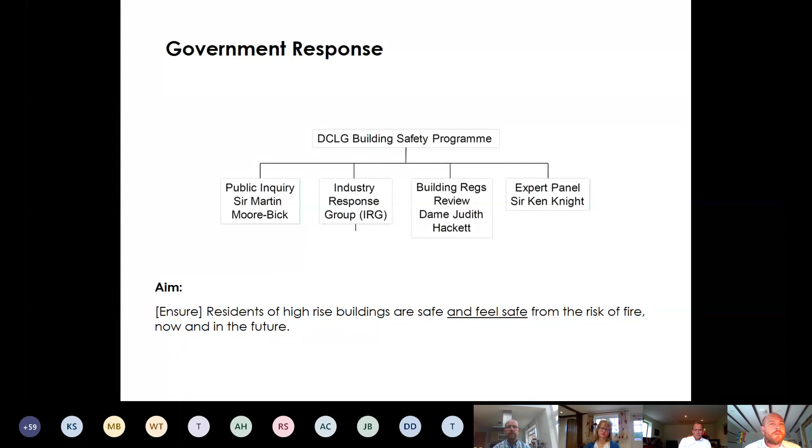So as a bit of a timeline: June 2017, obviously the Grenfell incident occurred. Then in July 2017, the MHCLG commissioned a large ACM screening test programme, which looked at all the different ACMs, the 3 different types, and tested them with different substrates and different external insulations within the cavities.

So you've got something like Duo Slab, the mineral batt, and you've got the phenolic insulation like K15. This was really to try and understand the fire performance of those, because for various reasons there was no testing data for them. I'm not entirely sure why there wasn't, but there wasn't.

Then again in the same month, the independent review of the building regulations was commissioned by Dame Judith Hackitt. Then in September 2017, the industry responded to a call for evidence, and then in December of the same year, Dame Judith Hackitt's interim report was published.

And then as we get further into it, it gets a bit more meaty. So in September 2018, the MHCLG circular on assessments of external wall cladding systems and advice note 18 called to remove all ACM from existing buildings.

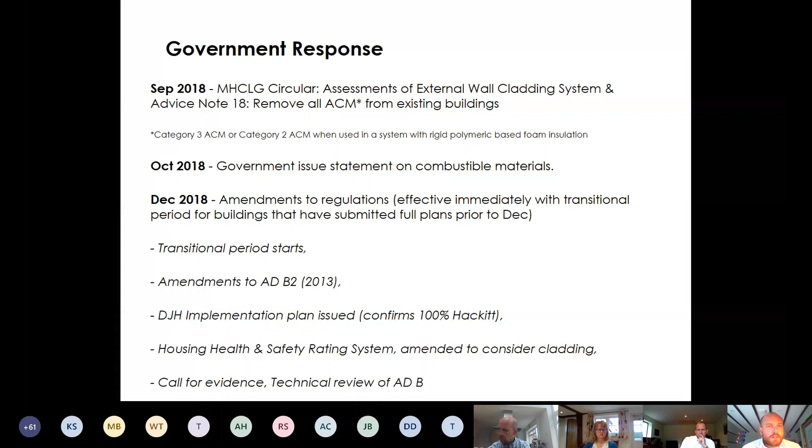In February last year, the transitional period for the buildings submitted for full plans expired, so everyone was now fully non-combustible, as it were. And in March, there was a further minor amendment to ADB.

In May last year, consultation on BS 84141 and BS 84142 was produced. 84141 is a test, which is what BR 135 is based off of. And it's the fire test of insulant materials over 18 metres.

One represents the backing wall, so one is masonry block, and two is a framed substrate, so SFS with sheathing board, which is more commonly found on buildings over 18 metres.

MHCLG issued their response to that and clarifications to any FAQs which came out of that, and then a government fund of £200 million was announced to remediate existing defective facades in the private sector with ACM, just ACM.

That was soon realised that that wasn't enough, and it got bumped up to 600 million. And as we'll come on to in a bit later, they then announced a £1 billion fund to try and remediate all facades, not necessarily ones just with ACM on it.

In June 2019, the government issued a consultation on proposals for reform of the building safety regulation system, which was an eight-week consultation. That was to go before parliament in 20/21. So we're kind of getting towards that process now, with obviously the draft bill just being issued last month.

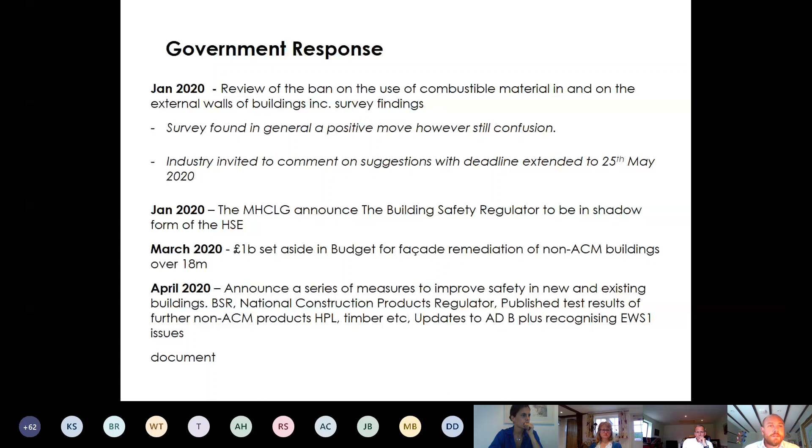And then in May, Approved Document B update was published, confirming sprinklers and consistent wayfinding signage to all buildings over 11 metres now. So there's a reduction there, 4 stories, but the relevant building requirement is still 18 metres. And the draft Safety Bill was published, plus a correction slip. So that was the big thing we'd all been waiting for last month.

And I said earlier, in August we're still waiting for an update from the MHCLG regarding the proposed changes, ban, and the review of that by industry. So that'll be quite important, because that will resolve a lot of issues again with regards to cavity trays, etc.

Hopefully. So if we go way back, before the changes, we had a whole raft of different ways for compliance with buildings over 18 metres, or relevant buildings. You had Approved Document B1 and B2 - B2 at that time, or B1 Volume 2, was the most relevant one. You had BR135, the fire performance of external thermal insulation in walls for multi-storey buildings. You had BS9999, you had BS9991, and you had BCA Technical Note 18.

BCA Technical Note 18 tried to pull all this guidance together and give the building control bodies a linear approach as to how we can approve or review these types of facades.

So, the changes to the regulations and ADB2. The first thing to note is that changes to regulations are law - there is no latitude, and they will always take the conservative position. Changes to the approved documents are guidance supporting the regulations, but ignore these at your peril, particularly when it comes to things like fire safety. However, they're not legal requirements.

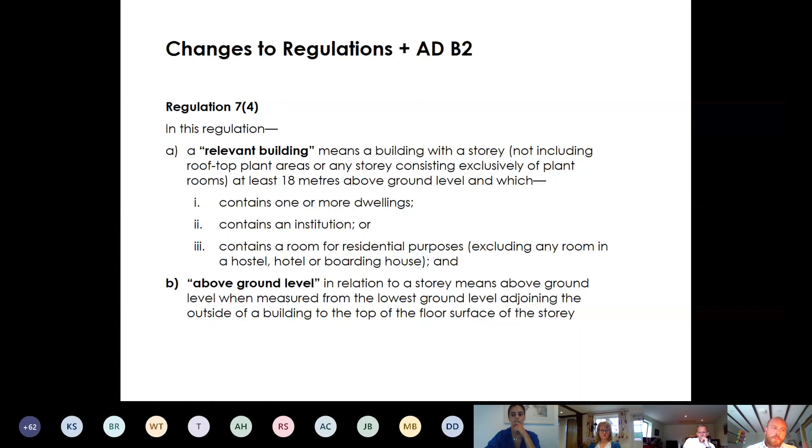And the first time we saw a real definite definition of 'above ground level', and it was in a regulation as well, so it's law. Above ground level, in relation to a storey, means above ground level when measured from the lowest ground level adjoining the outside of a building to the top of the floor surface of the storey. So it's not the median ground level, it's not the pump access level - you've got to pick the lowest ground level on that building, and that's where you take it from. So it's nice and clear.

And then Regulation 2.6: in these regulations, any reference to the external wall of a building includes a reference to anything located within a space forming part of the wall, any decoration or other finish applied to any external wall, but not internal surfaces forming part of the wall, any windows and doors in the wall, and any part of a roof pitched at an angle more than 70 degrees to the horizontal - basically where a roof turns into a wall, that magic 70 degrees. So again, first time it's in a definition in regulation, so it's law, of external walls.

And then there's also guidance on specified attachments in Regulation 2.6, which defines those as being a balcony attached to an external wall, a device for reducing heat gain within a building by deflecting sunlight which is attached to an external wall, or a solar panel attached to an external wall.

Now, again, clear guidance on balconies that hadn't been defined really before, or specifically in the approved documents. I've never really come across a solar panel within an external wall yet, but I know they have been done. And then obviously you've got your brise soleil, the reduced heat gain on a building.

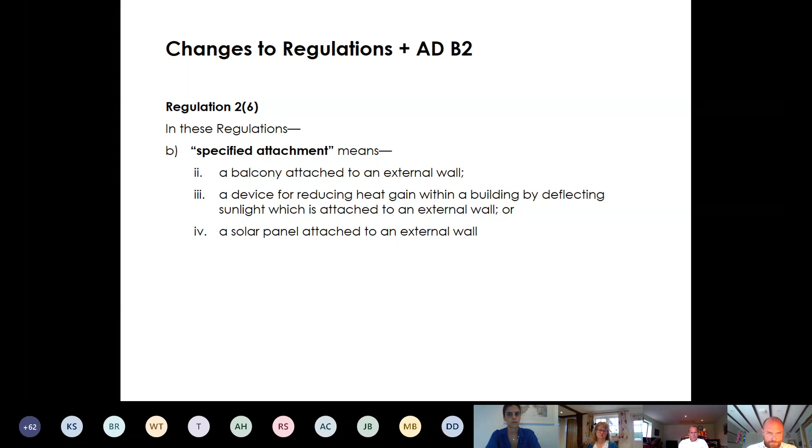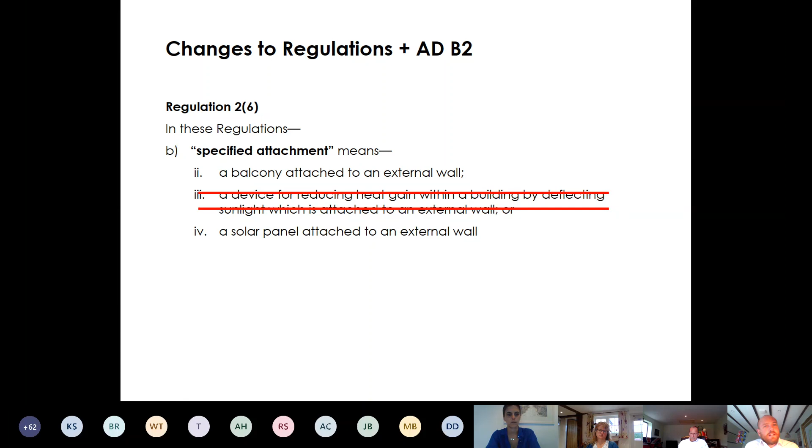Now that then got retracted because I believe a brise soleil manufacturer, or possibly an architect, took them to court over it, because the consultation period for that particular regulation change wasn't done according to the process. So it was a bit of a technical knockout, that one. It got taken out, but it's going to come back in again.

So the basic principle of these regulation changes was that all elements of an external wall, excluding internal decorative finishes, are to be to BS EN 13501 European Combustibility Class A1 or A2 S1 D0. So S is the smoke that's emitted and D are the droplets that are formed. Unless they're included in the list of exempt materials, which we'll come on to later.

So when looking at the approved document and the guidance that's around, obviously they had this circular from the MHCLG about external fire spread and B4(1), which states the external walls of the building shall adequately resist the spread of fire over the walls and from one building to another, having regard to height, use and position of the building. So it doesn't actually tell you the height you need to consider or the position, but it gives you this blanket overarching requirement. And this is what the government are kind of hanging their hat on, or previously did.

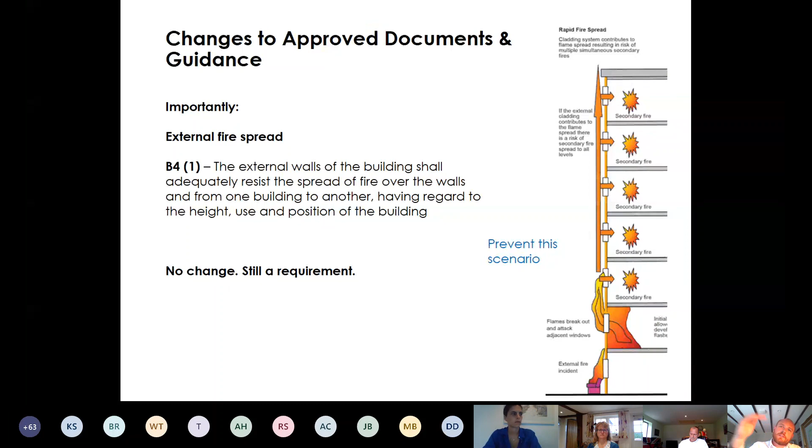So there's no change, it's still a requirement, it still exists. And as you can see from the diagram, it's to prevent this kind of scenario where you've got an external or internal fire. You get breakout through the window, and it then has a possibility to ignite the facade. If the facade doesn't adequately resist fire spread - it's got combustible materials in it, or it could be the surface spread of flame in the finishes - it can lead to secondary fires, and it can have this consequential rapid fire spread up the building.

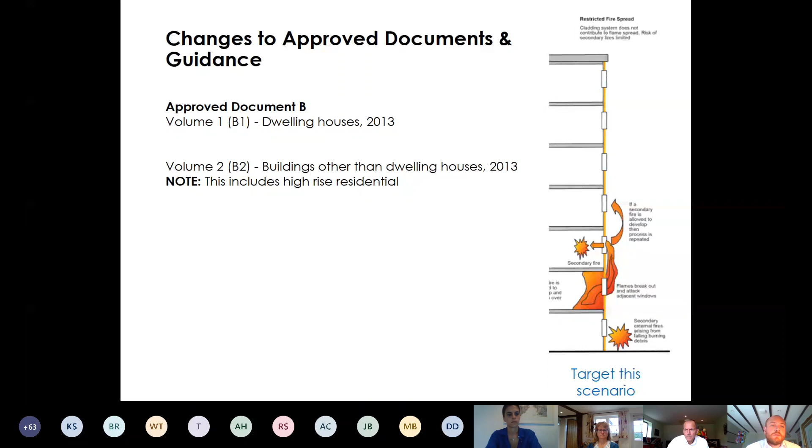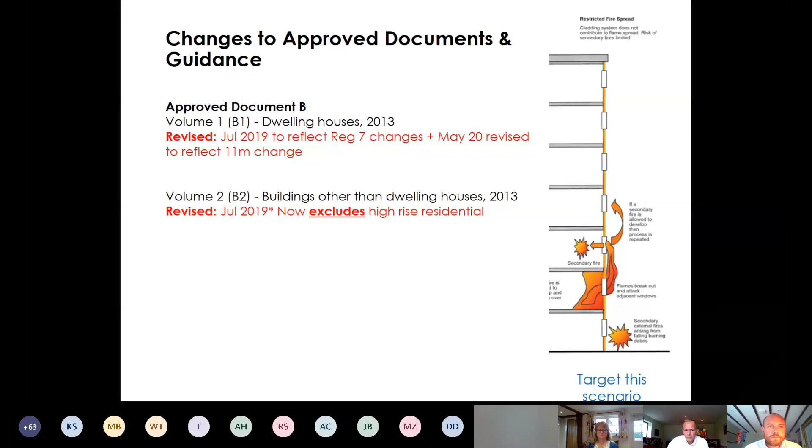Now, in approved document B, volume 1, B1, dwelling houses 2013, and we had volume 2, B2, buildings other than dwellings, but that included high-rise residential. They revised that in July 2019 to reflect the Reg 7 changes, and in May they revised it to reflect the 11 metre change. And then what we saw was that in July they took high-rise residential out of volume 2 and put it into volume 1, which makes more sense because it's residential and domestic.

BR 135, that guidance - the fire performance of external thermal insulation for walls of multi-storey buildings - has not been amended or redacted. It's still there, but due to the regulation changes, it's effectively made this obsolete for relevant buildings, i.e. BS 8414 testing is no longer an acceptable route of compliance. It's got to be non-combustible or not.

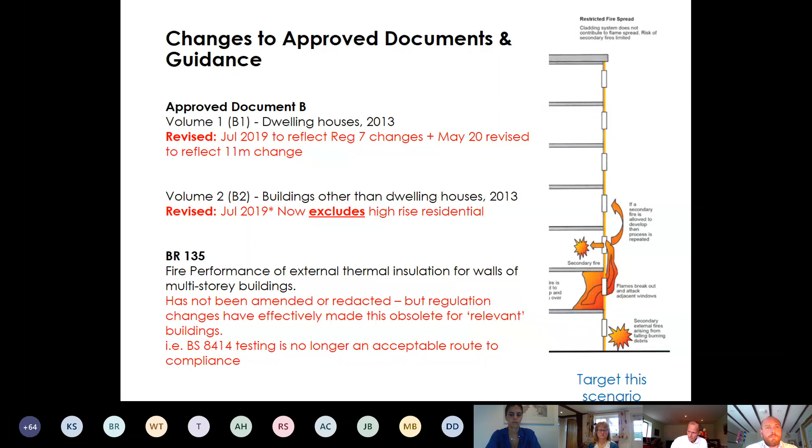The Building Control Alliance technical guidance note 18 was updated in September 2018 to include reference to the government circular. It's not been updated since, as far as I'm aware, to reflect the regulation changes, but is now effectively obsolete - I'll come on to that in a second. BS 9999, there's been no update since the regulation changes, but that will obviously need to be updated as well. And again BS 9991, same again, no update yet, but that will be coming.

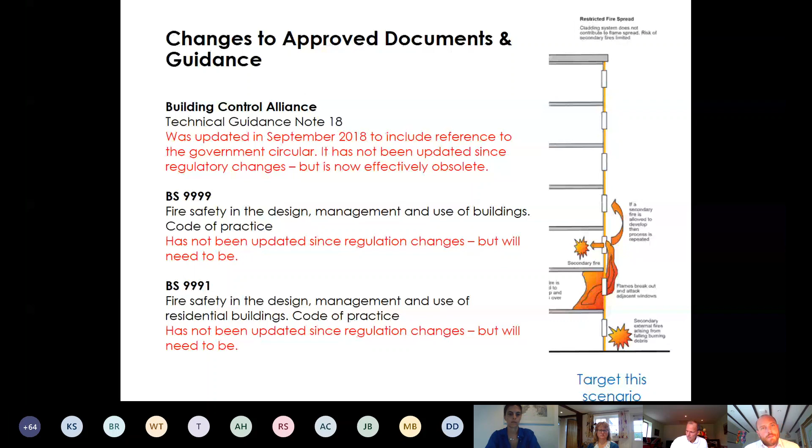So going back to the BCA technical guidance note 18, this gives an explanation as to why we ended up in the situation we did, where the ACM build-ups hadn't been tested and that sort of thing. It gave four options as to how you could comply or check a facade over 18 metres. Option 1 was basically complying with the approved document - totally non-combustible or limited combustibility or better.

Option 2, you had a full-scale test in accordance with BS 8414, part 1 or part 2, and install on site exactly the same construction, exactly the same breather membrane, exactly the same fixings - which is very, very rare to find. And what was found was that the actual test commissioned had been done by manufacturers. It wasn't like an independent test - it was Kingspan or something like that.

And obviously Kingspan used their breather membrane. They used their subframe for the rain screen cladding, etc. So yeah, it's a bit of a tricky one, that one.

And then option 3, you provide a fire engineered desktop study for each different wall type based on the BR135 approach and test data. This is where option 3 was mostly used, really, and we found all these desktop studies that were being produced, comparing various proposed facades against a current satisfactory fire test.

Now, with regards to ACM and aluminium, there was no test because it was a bit of a known secret that the performance is questionable, and the desktop study report that was mostly being hung on was one for a terracotta tile. Now, you can't really compare a terracotta tile to an aluminium rain screen facade, so it kind of got a bit disjointed, or not necessarily abused, but a bit wayward.

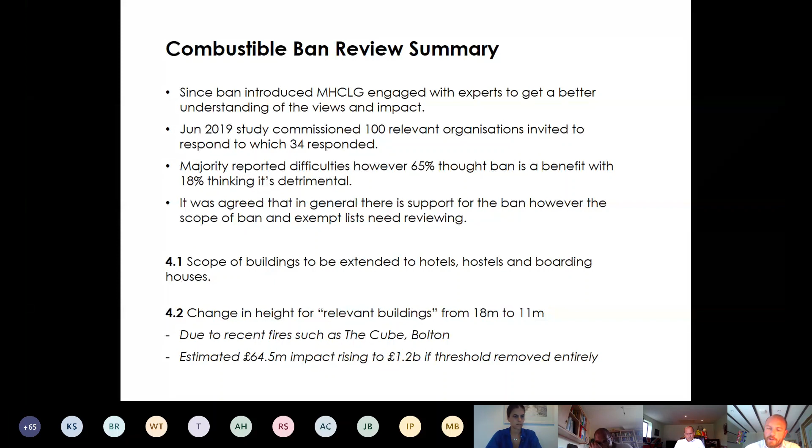Obviously that has come in now due to recent fires such as the Cube in Bolton. Now the impact of doing this, they reckon there's about a £64.5 million impact, rising to 1.2 billion if the threshold is removed entirely. So they took that into consideration and considered the 64.5 million as being something worth it, obviously not money over safety, but something that is doable.

And section 5, ACM PE core materials to have a complete ban on any building of any height, as the material poses significant risk regardless of scenario. So whereas essentially you could have a 3-storey building and still use ACM under the current regulations, they're looking for just a complete ban on ACM PE core, just because the calorific value is far too high. It's just too much of a risk, which is sensible.

And then section 6, solar shading included in attachments, but should retractable awnings be included, as currently they are? So the retractable awnings are those over your Costa Coffee or similar, where you've got your typical commercial space on the ground floor. There's a question over that, and basically none exist, or you probably could get them, but they're very, very expensive. So they're asking industry, do you think we should retract that?

Section 7, with a general review of the exempt list, requesting suggestions from industry for anything that they think should be removed or needs to be looked at, but they focused on a couple of items specifically.

So 7.1, they proposed an 18-month relaxation on cavity trays, or the exemption of cavity trays between two leaves of masonry. If it's between two leaves of masonry, you can have a cavity tray of whatever material you like, even combustible, so your DPC tray etc. But if you have an SFS or a different backing wall, then it has to be A1 or A2 compliant.

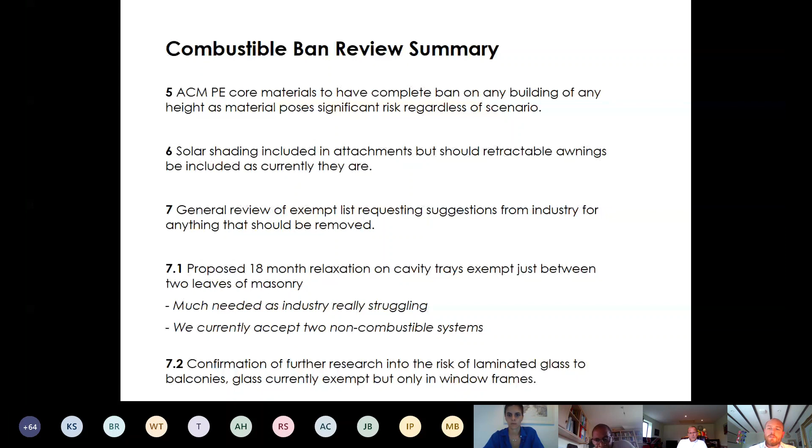7.2, confirmation of further research into the risk of laminated glass to balconies. Glass is currently exempt, but only in window frames. You saw a lot of balconies with these glass balustrades. In order to achieve the containment requirements of approved document K, a lot of them were laminated. Now the lamination, which is sandwiched between the two panes of glass, is highly combustible. But does it pose a risk? Don't know. The regulations said nothing on balconies, so that caused a bit of an upset. Most designs went back to traditional steel balustrades. But further research is going to be put into that to see whether that is actually a risk, with a view to possibly relaxing it or adding it to the exempt list.

There's additional clarification needed where roof membranes lap up external walls, and the Class B classification. On the exempt list, it's stated that membranes are exempt from Regulation 7 changes. However, there's also a requirement for any membrane on an external wall to be Class B. So there's a bit of a conflict between two bits of guidance, or a regulation and the guidance. Where you have a roof membrane, it may not apply on a parapet, because Regulation 7 doesn't apply there, as you've got two external areas either side of the wall. But if you had a roof terrace that butts a facade, and you have to lap the waterproofing membrane up the facade, essentially that is now a membrane on the relevant wall. Hopefully they can clarify whether it's a risk or not, because it's still very questionable, and they're looking into providing further clarification on that.

7.4 may lead into that one, where materials below ground level are currently exempt because they're sandwiched below ground when part of the facade, but they're looking to extend this to 150mm above ground level. This is particularly around roof and facade junctions, balcony upstands, etc. There's a lot of issues with insulation at those points, because it seems a little bit silly, but where you've got an inverted roof and your XPS insulation comes into your facade, essentially that thin strip of insulation is part of the facade. So by relaxing that zone, it kind of gets over that hurdle, and it questions whether it's actually a risk.

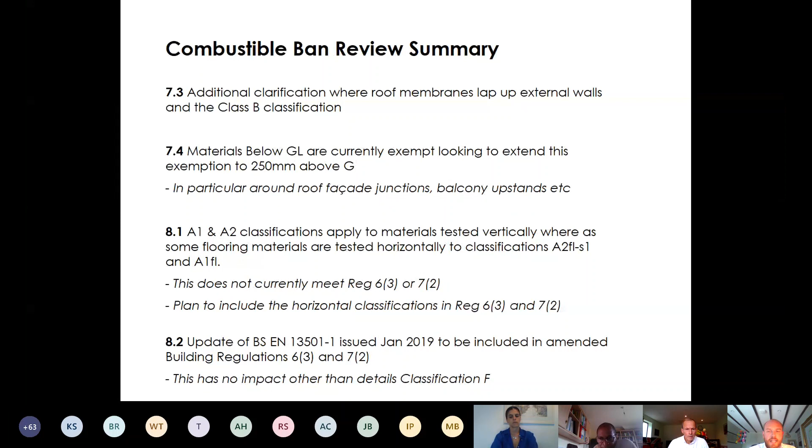They're looking to incorporate that, which I think is a sensible move. Then section 8.2: there's an update of BSEN 13501-1, issued in January 2019, which needs to be included in the amended regulation 6.3 and 7.2. This has no real impact, because the classifications are still the same, but they added another classification, which is F.

So on to the draft building safety bill. This was published in July, last month, and it's the first time we really get an indication of where things are heading and what the act looks like—it lays out the different areas, the duty holders, the classifications, the gateways, etc. It's still not in yet; it's got to be approved, but it gives us an indication of where we're going and what to expect.

In principle, combined with the fire safety bill and the fire safety order, which are also being revised and going to be issued towards the end of this year, the safety of residents in all blocks of multiple occupation will be improved. That is the main aim.

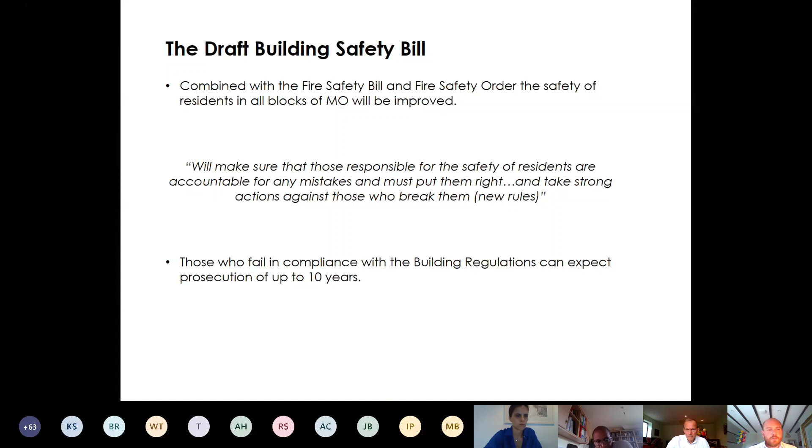There's a quote that says it will make sure those responsible for the safety of residents are accountable for any mistakes and put them right, and take strong action against those who break the new rules. If you dig into the guidance, if you fail to comply as a duty holder or accountable person, you could be prosecuted with up to 10 years in jail. So it's quite serious, the ramifications of that—and so it should be—but it's the first time we've seen any real accountability with regards to the building regulations in this area.

So the Building Safety Regulator, or BSR, will sit within the Health and Safety Executive, and have three main functions: to oversee the safety and standards of all buildings, directly assure the safety of high-risk buildings, and improve the competence of people responsible for managing and overseeing building work. It will establish a register of relevant buildings all across the country, existing and new—an ongoing thing.

They'll be responsible for all major regulatory decisions at key points known as gateways throughout the life of a building, from design and planning to occupation and ongoing occupation. This includes whether to allow the building to be constructed or later occupied—they have total control, they have the final say. So you could build a building, it's great, but it's got to be signed off by them, and until it's signed off, it cannot be occupied.

You can see there's going to be a whole new process the industry has to get its head around. We find as warranty providers, without our warranty, they can't sell the unit, and the unit, particularly in London, could be worth upwards of £10 million. So there's a lot of money riding on the certificate, but now there's a whole other layer that needs to be complied with—if the BSR aren't happy, it's not going to go ahead. The building needs to be complete, and no certificates can be issued ahead of that until the BSR are happy.

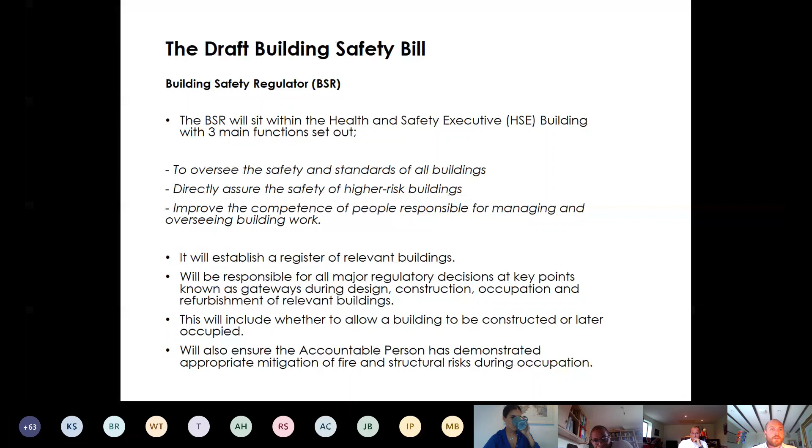It will also ensure the accountable person has demonstrated appropriate mitigation of fire and structural risks during occupation. So they sign it off, it gets occupied, and there's an ongoing accountability for the safe occupation and management of the building.

They'll also produce advice for duty holders to help complete their responsibilities, and give advice on current and emerging safety risks. So as well as just being a regulator, they're there as a resource for industry to go to. It's not a case of just saying you've got to do this and walking away from it. It seems like they're taking quite a proactive approach in being available for advice and that sort of thing, and trying to help get the buildings over the line.

They'll ensure designers and builders can access advice on delivering safe buildings, and advise government on changes to regulations and approved documents. So they really become the authority, the main place for regulation change or monitoring. Rather than, God forbid, waiting for another disaster, it's a bit more of a proactive approach. They'll oversee the performance of building control bodies and the competence of those working on buildings, to give confidence to duty holders and residents.

They'll give government new powers to better regulate construction materials and products under a new UK regulatory regime, which is what we kind of need. Currently, as warranty providers, we'll have a facade proposed to us, particularly under the new regulations, and we'll review it, looking at various testing data that's available. It's a bit disjointed, and it's still open to interpretation.

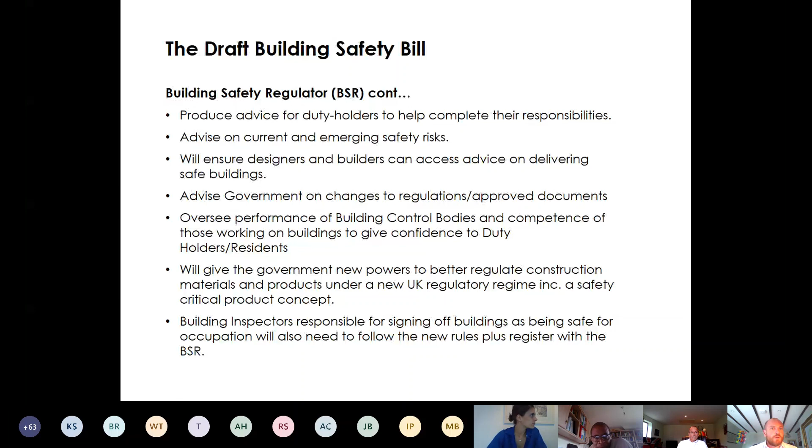So there's 3 main gateways that have come out of this now, or there's a bit more clarity on. Gateway 1 is at planning stage - it's the least onerous of the gateways, which ensures consultation with the local fire authority, and requires a fire statement covering vehicle access and access to water, amongst other things. There'll be further clarification on that, but that's at planning stage.

Gateway 2 is the pre-construction stage. So planning is obtained, building regulation approval is obtained, but you can't start yet till you complete Gateway 2. That requires full BSR approval before any work can start on site, and includes the start of the golden thread of material - the key information that needs to be passed on, or handed up to the various duty holders that take over the building through its life cycle, during pre-construction, during construction, after starts.

There is the potential for a phased approach leading to multiple Gateway 2 approvals depending on the complexity of the building, but that will be designated by the BSR as required.

Then you have Gateway 3, the pre-occupation stage. It requires full BSR approval again before any occupation can take place, confirming ongoing accountability, including sign-off from the principal designer and contractor of full building regulation compliance. Quite how you do that, I'm not entirely sure - whether you can take the building control completion certificate as recognition of full compliance, I'm not entirely sure yet.

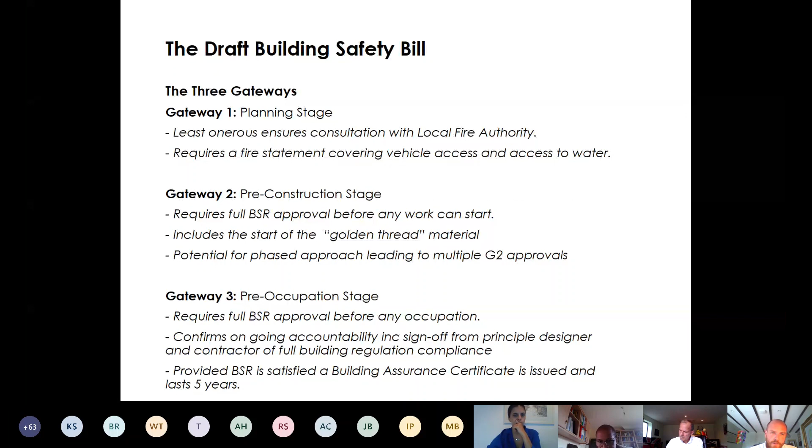And then, provided the BSR is satisfied, they'll issue a building assurance certificate at this stage, which lasts 5 years, which will then allow occupation to take place.

So we get various different new roles being sort of dropped in or announced in this building safety bill. Here's a bit of a summary of each one and what it entails.

So you have the duty holders. Duty holders will be designated by the BSR during the design and build, including those identified in CDM 2015 regulations, i.e. the client, principal designer, principal contractor, other designers and other contractors. So you'll be designated the duty holders, and they'll say who is the duty holder on each job. The duty holder can then be an organisation or an individual, so it could be a whole architectural practice, or it could be an individual within that practice. You don't necessarily want to be in their shoes.

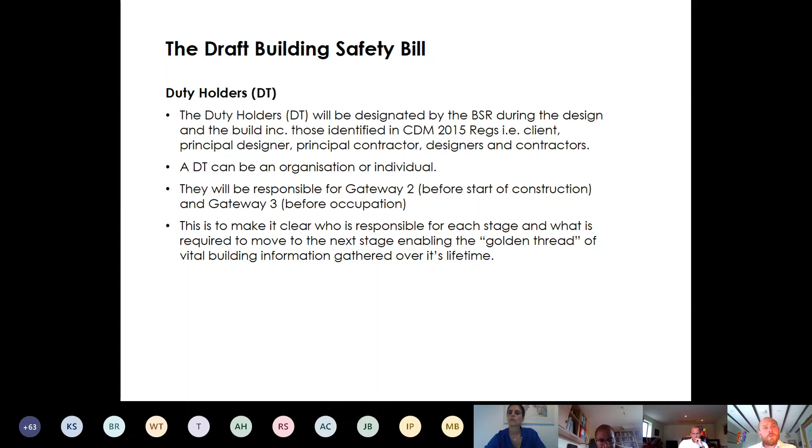They'll be responsible for Gateway 2 and Gateway 3 completion, which is pre-start and before occupation. This is to make clear who's responsible for each stage and what is required to move to the next stage, enabling the golden thread of vital building information gathered over its lifetime. So the duty holders are responsible for the design, the construction, and then the completion of the building. That's where the duty holders are responsible, and they'll then hand over to the accountable person.

So the accountable person, upon completion of the building, will need to be registered. The building will need to be registered with the BSR, and the accountable person needs to apply for the building assurance certificate, or the BAC. Once occupied, the accountable person will need to conduct and maintain a safety case risk assessment from a fire and structural risk point of view, and will more than likely be an organisation, but could be an individual, and in complex buildings could have more than one accountable person.

They will appoint a building safety manager to oversee the day-to-day management. This appointment can be vetoed by the BSR if deemed necessary. So if they're not happy, the BSR needs to know who the accountable person is, they'll check them, then need to know who the accountable person has designated as the building safety manager, and they'll check that too. If it's not demonstrated that they're competent, they will not approve it. So there's so many different steps here which can get in the way of buildings being handed over in good time, with money being transferred, etc.

The building safety manager and accountable person will have to listen and respond to residents' concerns quickly and effectively, which was one really big thing that came out of the Hackitt report with regards to Grenfell. The BSR will regulate their performance throughout the lifetime of the build, so they'll be constantly monitored to make sure they're doing what's needed, and ultimately maintaining the safety of residents.

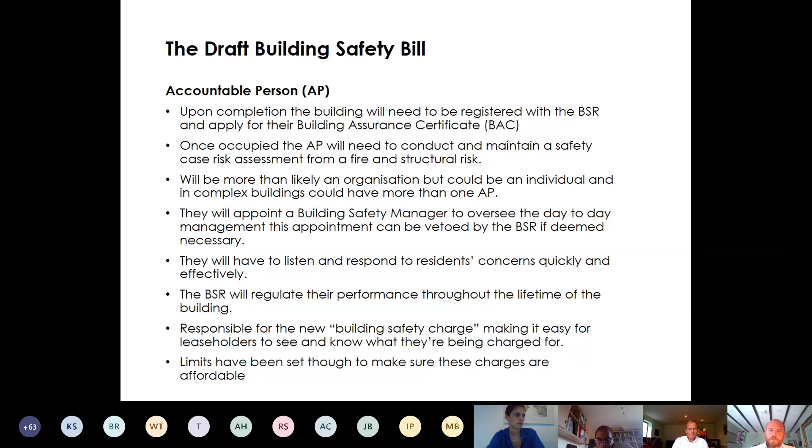So now there's a new building safety charge. Before anything gets taken out, or funds taken from that account, it needs to be applied for, and residents or leaseholders can see exactly what's coming out and exactly what it's for, so it doesn't get taken advantage of. Limits have been set as well, so only a certain amount can come out of that building safety charge, to make sure it's affordable, because replacing facades isn't cheap.

We've had a couple of jobs we were involved with where the facade did get replaced, and it was the good side, or the other side, of £3 million for just a 7-storey building, so it's quite expensive.

So the building safety manager, appointed by the accountable person, can also be an organisation or an individual. They ensure conditions in the building assurance certificate issued by the BSR are complied with to the satisfaction of the accountable person and ultimately the BSR. So when the BSR issues the building assurance certificate and says you can take occupation, they can stipulate certain conditions on that certificate, and that's going to be the key focus, making sure the building safety manager ensures those conditions are being complied with or satisfied.

They ensure the competence of those employed in the maintenance and management of the building is also acceptable. Again, that would also be probably a condition on the building assurance certificate.

And implement a resident engagement strategy, ensuring a clear communication conduit for the residents, so they'll be the main go-to person for the residents if they have any concerns, or to maintain a constant flow of communication between them and the residents, to make sure that everyone is ultimately safe, or feels safe.

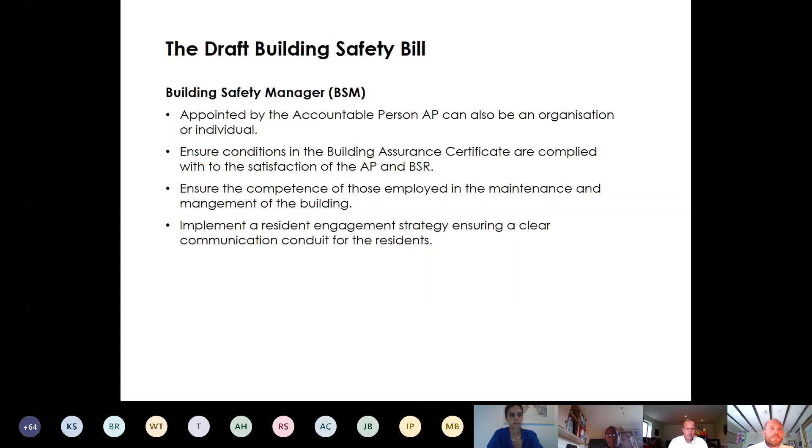So the residents, who are obviously the main driver for all this, are entitled to receive key information about their building and how it's being managed at any point, and are allowed to participate in decision making with regards to the safety of their building.

And if the building safety manager is not performing, they can go straight to the BSR and raise their concerns. But equally, as we found in the Hackitt report, the residents also have a responsibility to cooperate with the BSM and any requirements they ask for, and if not, the BSM can enforce responsibilities upon them. It also allows the residents the right to complain to the new Homes Ombudsman, of which developers must be a member, holding them to account, including the ability to pay compensation when needed.

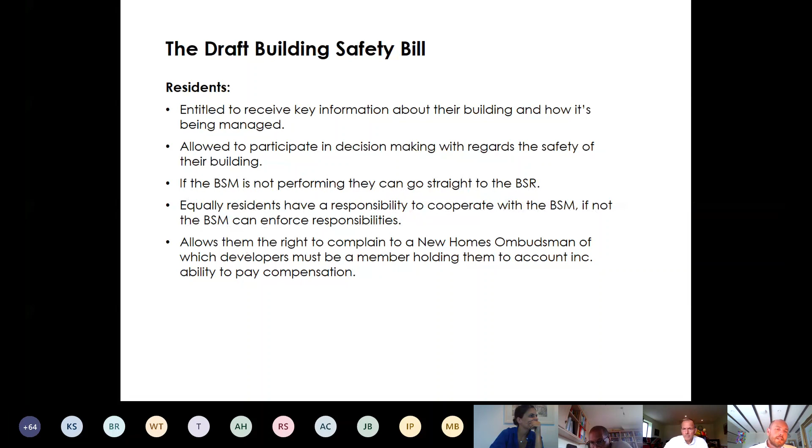So if a facade remediation is needed, then the Ombudsman can hold the developer to account.

Something that me and Trevor chatted about a couple of weeks ago, there's this new permitted development relaxation. I thought it was quite relevant, where they're allowing an additional 2 stories on blocks of flats or apartments, which can, depending on the height of the existing building, have quite a big knock-on effect. It's just whether people really understand that.

We need to make sure that when we have this scenario, we get in there real quick, and make it known to the developer or the client exactly the implication of that. For instance, if you had a building that was previously sub 18 metres but is now 18 metres or over, it then becomes a relevant building. Therefore, the entire facade needs to be compliant.

The fire performance of that may also have an impact on things like sprinklers, dry risers, firefighting lifts, etc. All the life safety elements within that building may not now comply because it's pushed it into a relevant building area. And equally, if it's below 11 metres and now it pushes it over 11 metres, you've got to put sprinklers in it, and that sort of thing. So it can have a real big impact on the existing building.

It's not a straightforward process when it comes to the building regulations. So yeah, and also it would be subject to the BSR as well, so you'd have to go through that process.